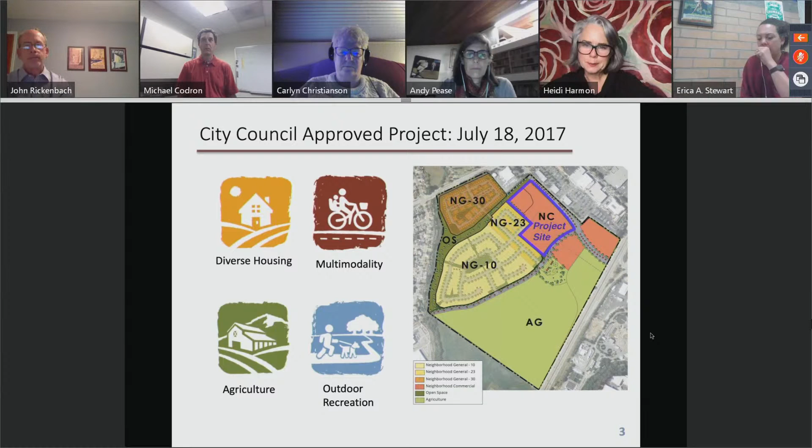The San Luis Ranch project was developed during the land use and circulation element update, beginning in 2012, culminating in 2014. And since the adoption of the LUCE, the project has been evaluated by numerous city and county review bodies.

The LUCE provided specific direction for the San Luis Ranch specific plan area, including requirements for flood remediation and Airport Land Use Commission conformance. Those are the two constraints that I'd like to highlight tonight.

So all of these next slides are coming out of our Airport Land Use Commission hearings, and that was a 3 to 4 year process. The adopted county airport land use plan maps identify most of the San Luis Ranch site as lying within the S1B safety zone, which allows 1 residential unit per 5 acres of land. So let that sink in for a moment.

You can see that this map, which the Airport Land Use Commission itself calls their crayon map, actually takes in everything up to and including the post office property. Next slide, please.

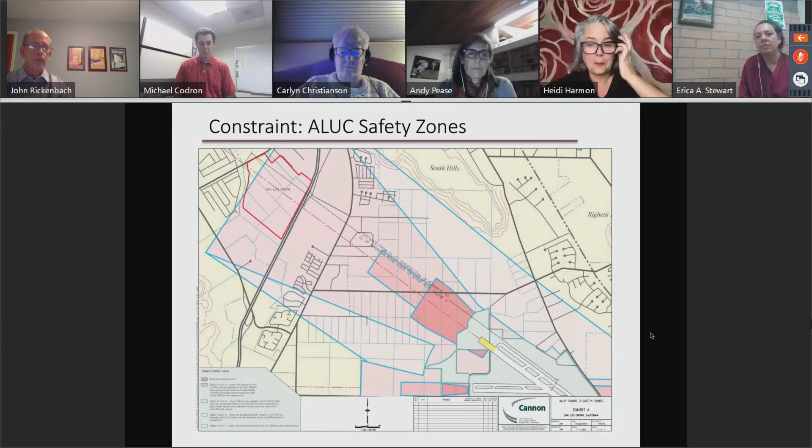The ALUC acknowledged that their adopted map was actually inconsistent with the language of their adopted plan. So a corrected map was prepared by Cannon. You can see here that the S1B area takes in less of the site with this map correction, which is what allows for some additional residential density on the site.

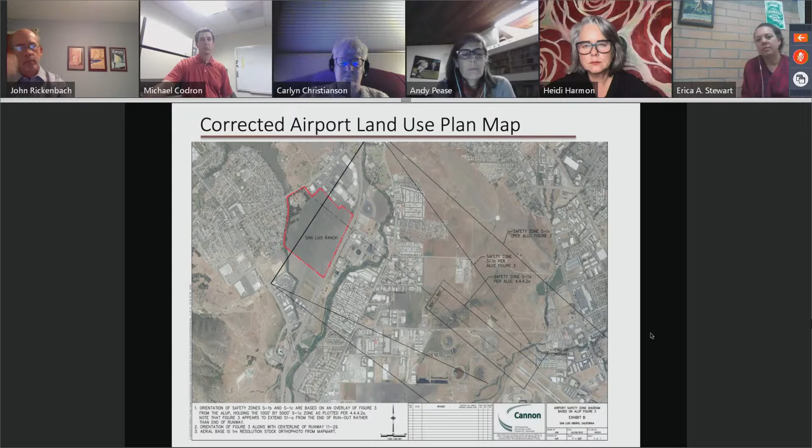This slide just gives you a very brief glimpse into how detailed the multi-year analysis with the Airport Land Use Commission was. I am not going to walk you through this slide, it's extremely painful. It was painful the first time, and you don't, trust me, I hope you never need to know any of this information.

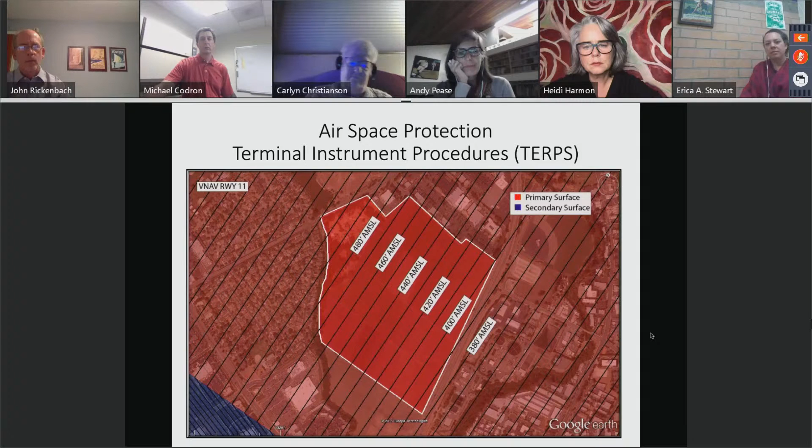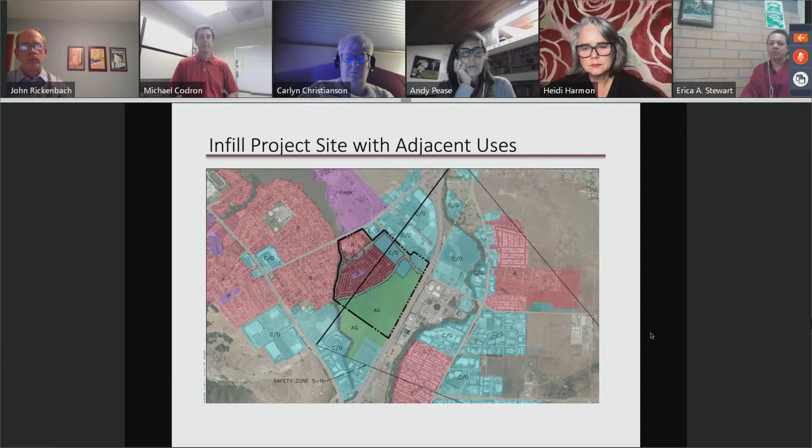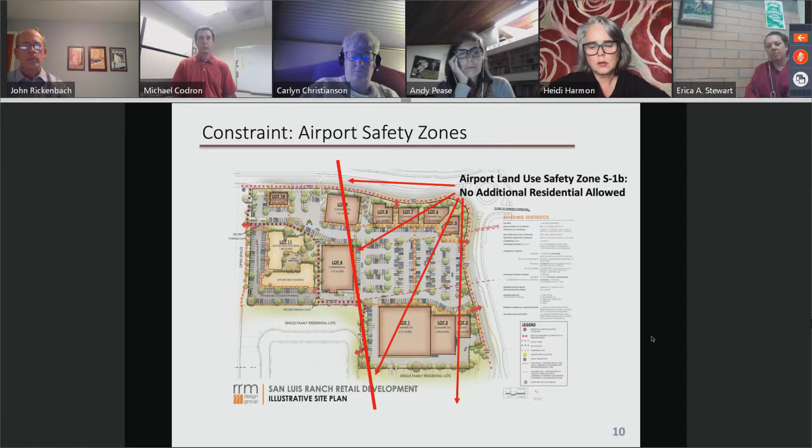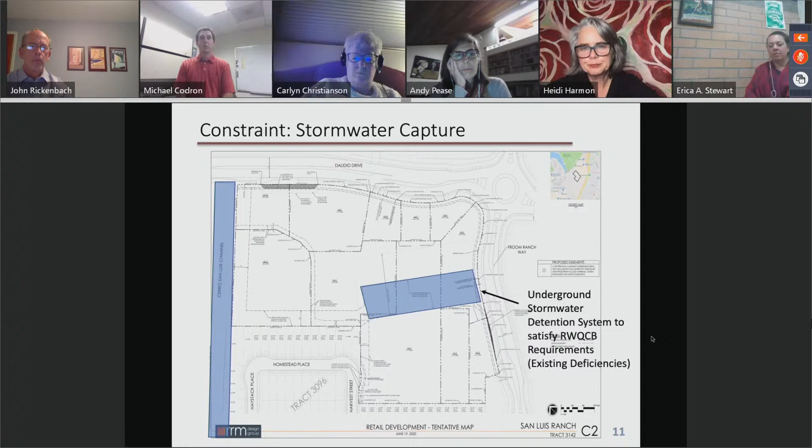Additionally, the site was responsible for capturing stormwater from Cerro San Luis and the existing Madonna shopping plaza, so a lot of those drainage inlets and infrastructure on the older Madonna shopping plaza is undersized. So it made improvements to Cerro San Luis channel up against the post office. We also put in underground stormwater detention systems, which satisfy the Regional Water Quality Control Board requirements to address those existing deficiencies in stormwater flows. You can see that the underground stormwater detention facilities actually overlap with the strict no-build zone for the Airport Land Use Commission.

So moving on from constraints, let's move on to opportunities. The first one is residential clustering. When we look at the site overall, as opposed to just the NC zoned siting, you can see that the proposed People's Self-Help residential product is actually located directly adjacent to the NG23 and NG30 neighborhoods, as well as the open space trail system. So you can see that they're actually all tucked in together.

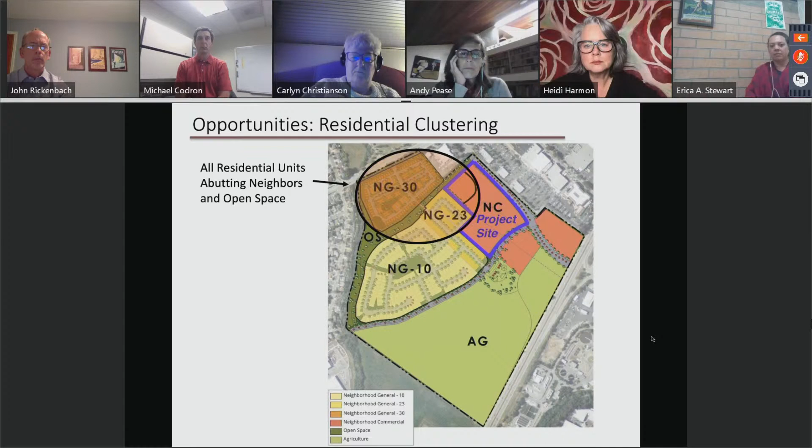The next slide will actually look at the connectivity between those uses. I apologize, this slide is a little bit cluttered, but the blue lines indicate paths of bicycle circulation, the green lines indicate pedestrian circulation, and the orange lines represent pet walking circulation.

So you can see that the People's Self-Help residential site is deeply integrated into the multimodal circulation of the site, from the open space path along the San Luis Channel through the neighborhoods and to the Central Park, and then connecting into the fitness loop that runs all the way around the project. So there's a lot of opportunities for connectivity from this corner of the site.

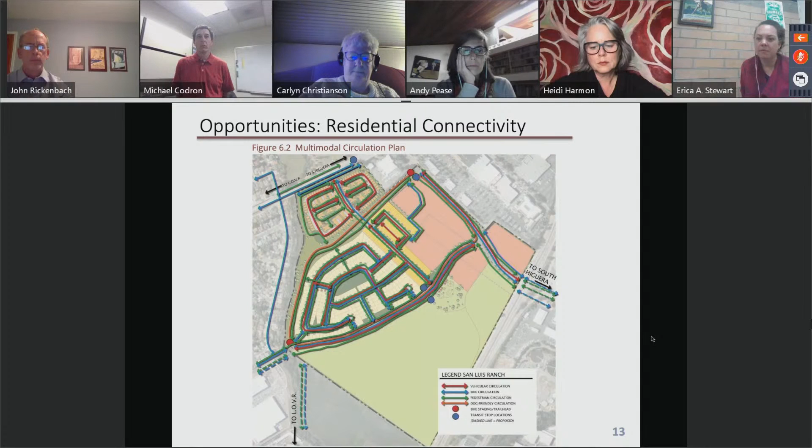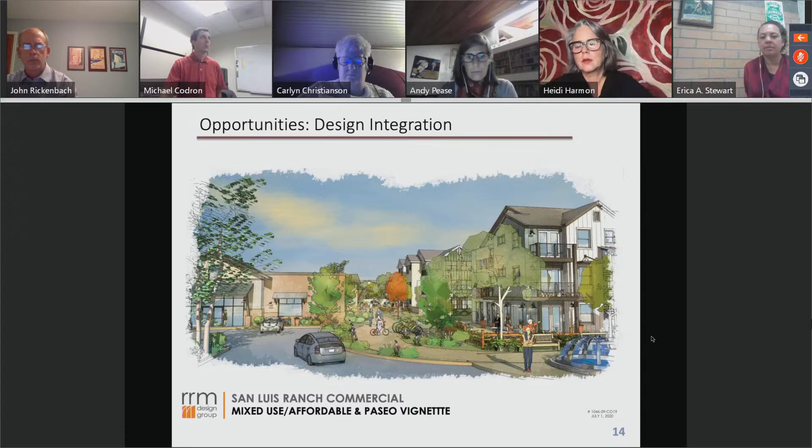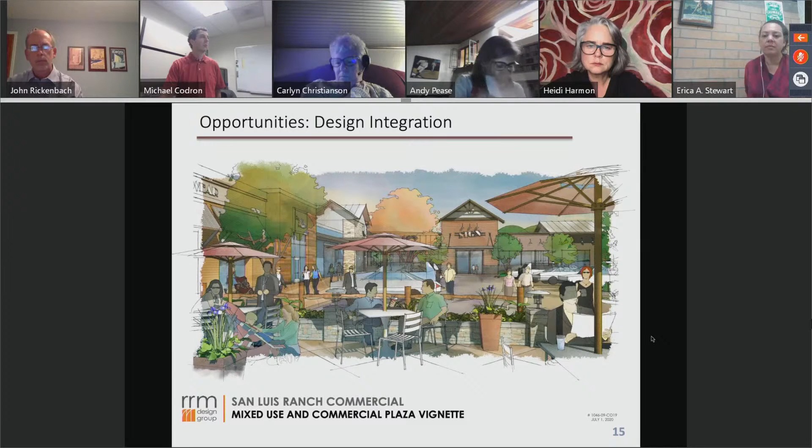So our goal tonight is just to get approval of the specific plan amendment and the tentative tract map, primarily so that People Self-Help Housing can go forward and pursue funding opportunities while the San Luis Ranch team continues to develop plans for the commercial center. We do not want to hold up the critical work that People's wants to do.

They have some very stringent timeframes for grant proposals and those sorts of things. So we want to cut them loose through this tract map so that they can go forward, get their funding in order, design their buildings. We want the maximum number of affordable units to be built on this site just as soon as possible.

In order to facilitate that goal, we do have one concern that we would request the council consider tonight. We'd like some clarification on condition 28, which requires each residential unit, including affordable units, to be separately metered and billed. That requirement for individual meters is actually quite burdensome for People Self-Help Housing because individual meters increase their cost and complicate their process to obtain funding.

So we're hoping that language can be added to the second sentence to read: all for-sale residential units are to be individually metered. Or alternatively, a sentence could be added clarifying for-rent units don't have to be metered individually for this particular affordable development. This will allow People's Self-Help Housing to keep these affordable units actually affordable to low and very low income families.

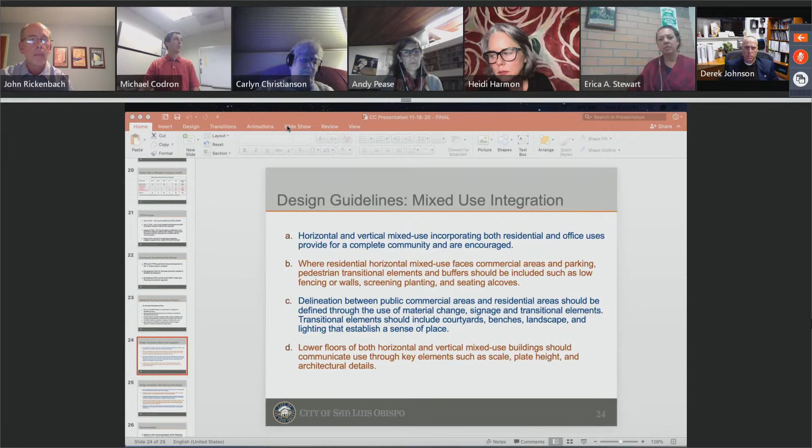And while John's bringing that up, this is Rachel again. I can jump in and let you know that in addition to the residential limitations placed on the project by the Airport Land Use Commission, we also have a restriction of 175 - they call it boots on the ground - person occupancy per acre on the commercial site. So that's part of the reason the commercial footprint overall has been squeezed, because when we're calculating out various uses, we need to be very careful not to go north of 175 persons per acre maximum occupancy.

So this is John again. I don't know if everyone can see the screen I have up.

It's a lot to read, and I'm not going to read it all, but I have two different slides which are in the packet. What we asked the applicants to come up with when they proposed this was more language in the design guidelines that would get to these questions we knew you and the Planning Commission, even ARC, would have. They have to do with, for example, in D, the lower floors in the buildings should communicate through key elements and architectural details that have to do with scale. Item C here, again, there are design features that should encourage a sense of place with the people who live there and the people shopping there, for example. So there's a lot of design issues here.

So John, following up on that, and that is where I was pulling that language about the vertical and horizontal mixed use. It's a super helpful document there. Especially when we are thinking about vertical mixed use, is the tract map being developed in such a way that we're limiting our ability to do that? It doesn't seem to be laying out for that. I'm getting like, okay, maybe residential, as much as I'd love to see residential on the second floor of that one building, outside of the airport use, and maybe that could happen, maybe it doesn't. But I guess I'm just not seeing where vertical mixed use is even on the table.

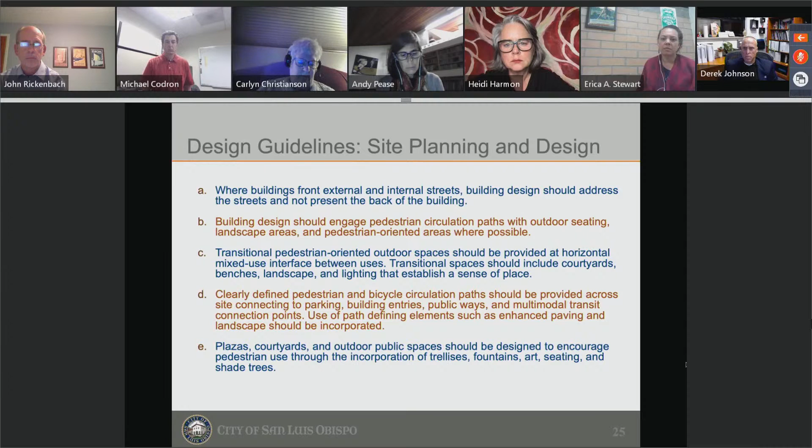So at this point, we are in very, very preliminary stages of design work on the commercial side of things. I can tell you that ARC and the Planning Commission have been very clear that they would like to see some multi-story elements within the commercial development. So we're looking at ways to appropriately incorporate those into an interesting design that can get some of that vertical mixed use. Obviously, I think that the folks designing this will also tell you that with the changes we anticipate coming out of the pandemic, we're not entirely sure at this moment what the market is going to look like. So for example, small office space on the second floor, small coffee shop type retail, might be exactly what people are looking for when all of this dust settles.

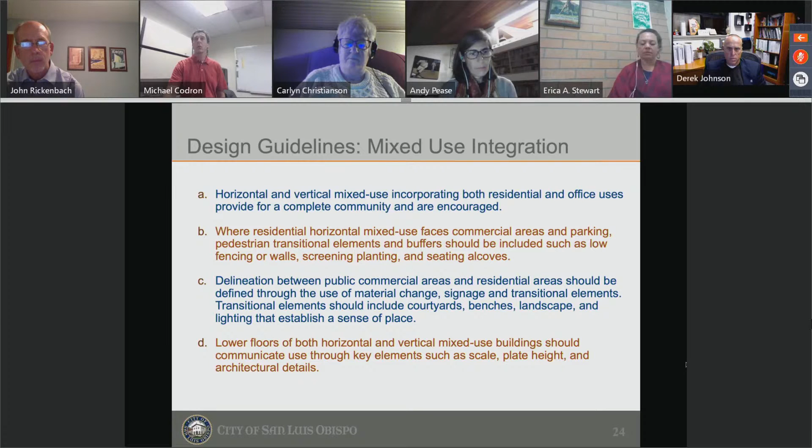So I think the bottom line from our perspective is that this commercial portion, the development plan, is a work in progress. We're going to need more information, more data points moving forward into 2021 in terms of what is marketable, what direction retail is going, what direction office is going. All of those things are going to come into play, and that will all be addressed in the development plan. Again, we hope to bring that forward in the first half of 2021. Originally we had that slated for closer to the end of this year, but of course that was pre-March, and the world of commercial is shifting.

So I have every anticipation that the ARC and Planning Commission will do what they've done to date, which is really hold our feet to the fire in terms of getting the very best, most integrated, most pedestrian-friendly, forward-thinking design possible out of whatever it is that we present. They'll have all kinds of opportunities to see that. We're certainly hoping to work collaboratively with them on that. It's just at this point in time, People's Self-Help Housing has some pretty critical funding deadlines coming up. We do not want them to miss those funding window opportunities waiting to see how the dust settles on the commercial side. So we understand all of the concerns. We think we can do a multi-use, multi-level, really interesting, pedestrian-focused design here. It's just going to take a little bit of time to do that.

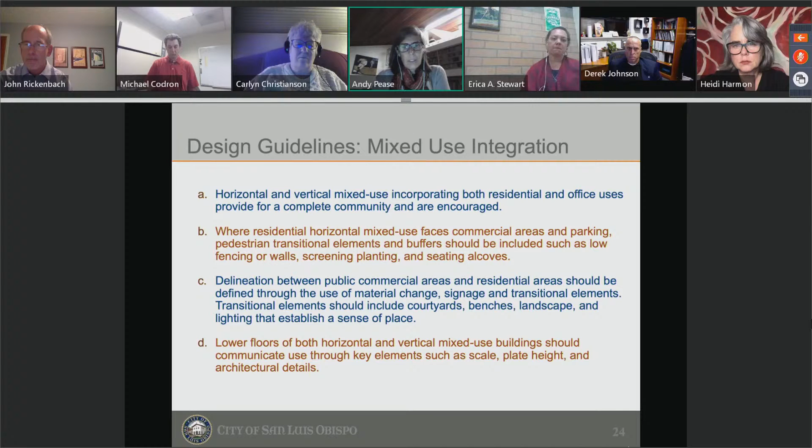I'm feeling a lot more comfortable now. My last question is about the site plan where there are lots 8, 9, and 10 that are small. If those need to shift or combine to create a bigger building with stacking, is that a big deal? Are we limiting ourselves by having these little blob buildings, or can that still come together at the staff level, the director's level, or through minor shifts?

It does make sense, and it comes up on virtually every subdivision. There's some shifting around between the tentative map and the final map. Lot combinations are possible, and lot line adjustments are even possible after a final map is recorded.

The limitation is that after a tentative map is approved, I can't recommend to the city council that the final map be approved if it has a smaller or larger number of lots. So lots can be consolidated and adjusted after the final map is recorded, but from tentative to final map, you've got to keep the same number of lots in roughly the same configuration, though we have some flexibility there.

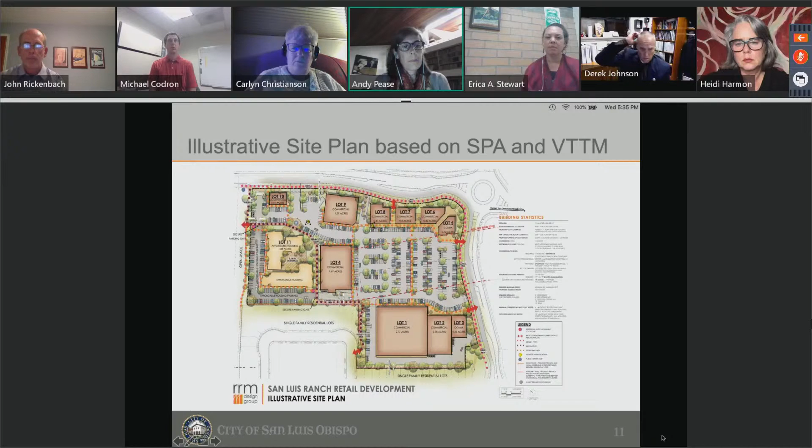Well, the other question is about the meters that you were just talking about at the beginning, John, or Rachel, somebody. Maybe I'll ask a question about the meters.

There's a pattern where when people know how much energy they're using, they adjust their use accordingly. So from an energy efficiency perspective, metering is positive, but it doesn't need to be a legal energy company kind of meter in my mind in order to get that benefit. That would be my goal, but I don't know where that condition came from at the staff level.

I'm just bringing it up so we can read it in case there's something to talk about here. It's number 28 here on the left. Yeah, I can blow that up.

I can't speak to that, it's sort of a utilities question. So if we had anyone from utilities to speak to that, it might be useful.

This seems to have the kind of language I'd be looking for: privately owned sub-meters may be provided for residential apartments. That seems like the type of thing that would be useful. I mean, it could even be on an app.

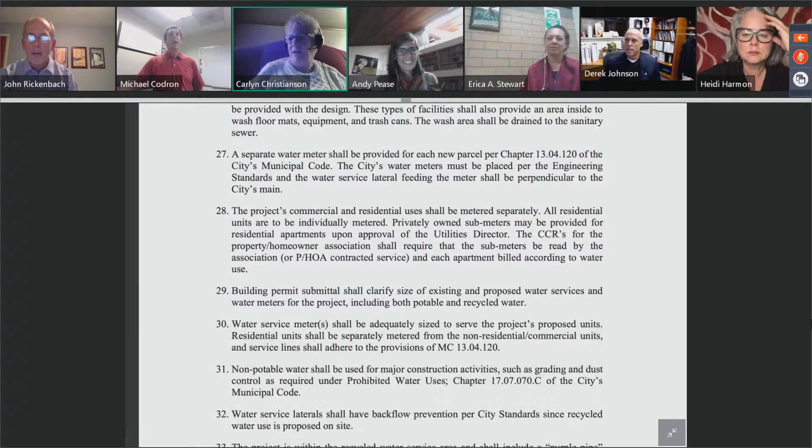Isn't that what we're talking about? I mean, I'm kind of where Christine is. I don't know what you guys are asking us for. All I want to say is what we've already said: the reason you have individual meters is so that people know what they're using and can adjust their usage accordingly. Other than that, we don't care. Whatever the language, whatever is required legally, it has to happen. But other than that, sub meters, master meters, we don't, it's like, geez, come on, let's go. I'm getting emails, I'm sorry, but I really gotta be done.

Michael, can I hop in here? Can I just say, what are we trying to achieve? I don't know, because we can write the language or give you a yes or no answer of whether the current language provides the objective that you're trying to achieve.

This is Rachel again. If possible, we would love to see a single meter for the People's Self-Help Housing property. Only the affordable units would be affected, if it is possible under current code, for John's regular program of tracking water use for his residents. If we can give them one meter, save them the cost of additional meters and sub-meters, that would be great. If we can't do that under code, understandable.

So can we just add, I don't have the language in front of me again, but can we just add 'or as per utility director' to that first sentence, the one that says it has to be sub-metered?

Well, we're being asked whether we want to basically allow people to have unmetered utilities usage. And I think, aren't we? I mean, and the answer is no, we're not. We want people to, it doesn't have to be formally metered going to the utilities department, but we want people to be able to say how much electricity am I using. I think the confusion, Carlyn, is that meter in a building industry means a utility meter. Otherwise it's called a sub-meter.